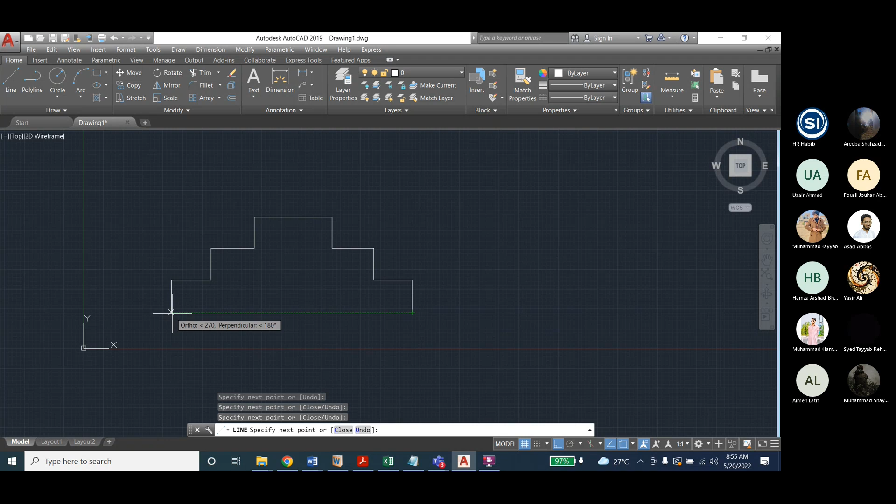And you can use the OSNAP. Like this, the stair on both sides. Like this, done?

It's not matching equally. Just like this, okay, you have to fill it.

Now this object is closed, this drawing is closed. If it is open, meaning there is a small gap or a minor gap between two lines, two endpoints, then this is not a closed object. Then you cannot use the hatch command. So keep it in mind. If hatch command is not working, it means you are not using OSNAP or you are not properly drawing this object. Okay, let's go to draw and hatch.

In hatch, there is an option pick point. Here you can see the pick point. Pick point, just enter, click the center of the object, and it will be done. And you can change the color, for example change to blue color, like this. So hatch is done. Okay, so this drawing, you have drawn this sketch.

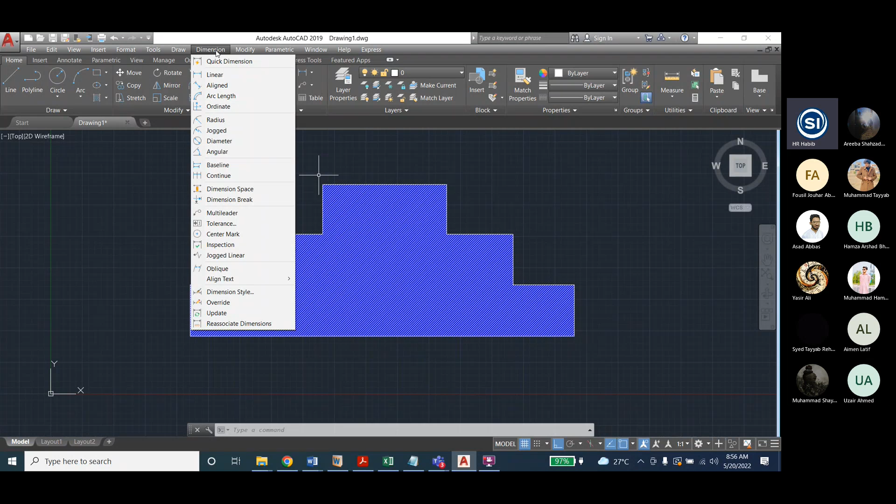Now again we want to go to override, and to use override and update, we will do something, I mean dimension. Go to dimensions, linear dimension, and just draw this dimension, for example like this.

And then go to baseline dimension and draw the remaining one like this. Okay, so we have done this. Right side of the stair, we have used baseline to dimension this.

We need linear first, first one linear and then use the baseline. And on the opposite side of the stair, we will use dimension, for example continue, just to see the difference. So continue.

Continue, it is continuing from the last command. So I think that's not feasible. Baseline is okay, baseline is okay.

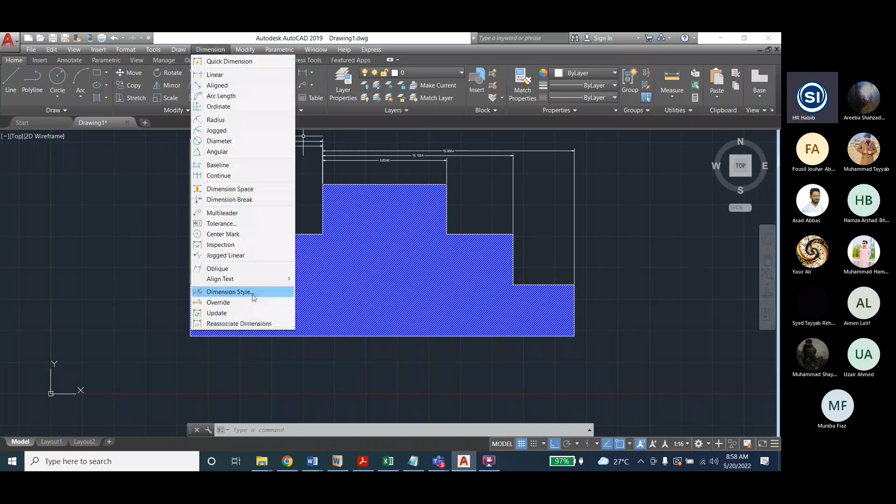Now go to dimension, go to dimension style, and you can also write D in the command window and just click. This box will appear, and here we want to select the new style. For example, 1, I will name it new style 1, and continue and continue.

Okay, I will write 1. So 1, this is 1 because style is 1. Just to remember, the style is 1 and arrow size is 1. Text size is also 1. Just go to and text size 1, okay.

And text color, you can change the text color, for example green, just to see the difference. And similarly in lines, you can change the lines color red, and extension lines, for example yellow, just to see the difference. Done? Okay, then okay, so style 1 is okay.

Now we want new style 2. Continue. And then go to symbols and arrow size is 2. Symbols and arrows, the arrow size is 2, and text size is also 2, okay.

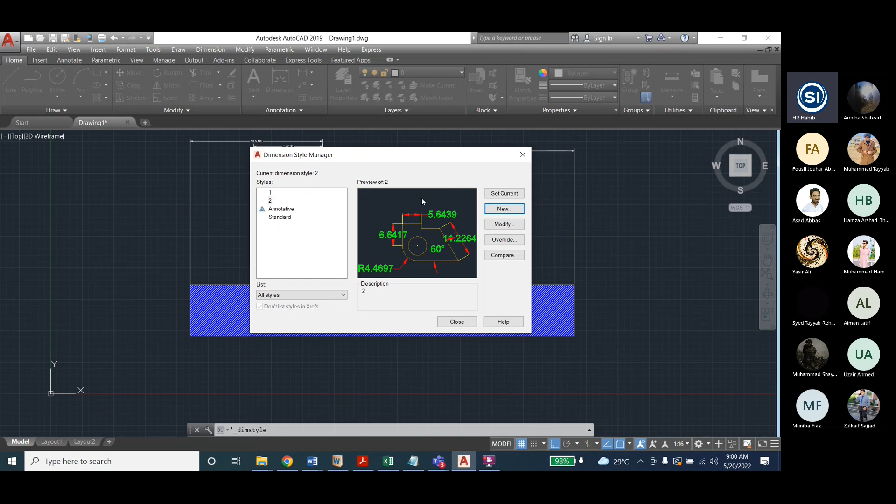Remaining is okay, remaining we are not changing, okay, two sizes okay. Now new, again new, style 3, type 3, and then go to arrow size is 3, and similarly text size is 3, okay, and okay.

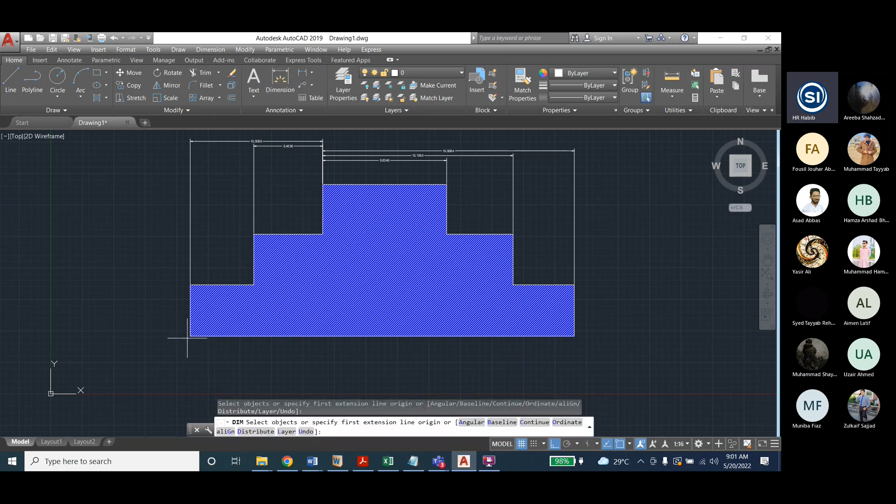Now style 1 is selected, but if you will draw any other new dimension, for example, I will draw new dimension in the bottom, just draw, you will see style 1 is applied. Done or not? Who has done this?

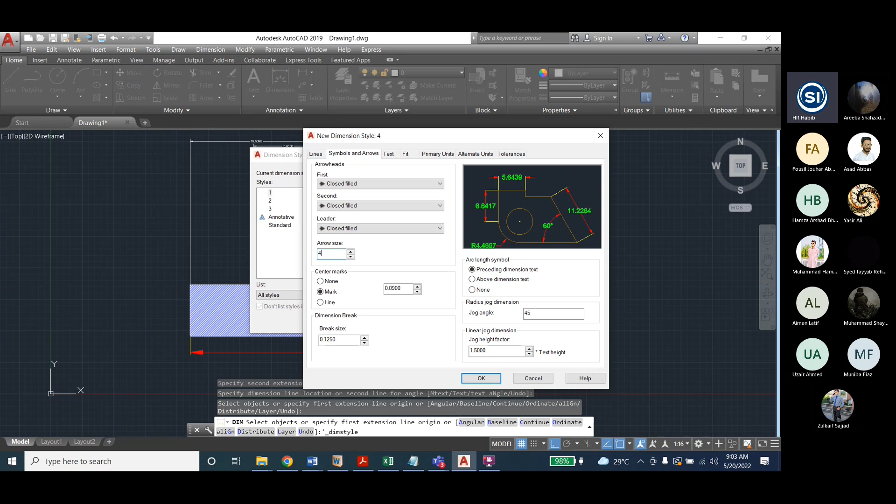Okay, you will say name it as 4, then continue, and then a new window will appear, and you will go to option symbols and arrows, and there is an option of arrow size, and you will change it to 4. You will change it to 1 or any size you want, and then go to text option.

And the text height is again changed to a new value. I'm changing it to 4 because I'm naming this style as 4, for example, and click OK and close.

So now, for example, if you will go to dimension style 1, and then I will set current as 1, style number 1. Okay, so style 1 is now set current, but if you will draw new dimensions, for example, click here and then just dimension any side, you will see the new dimensions are placed with the new style 1. Yes, but the previous, you can say, all previous dimensions are only set to standard, so we want to change those dimensions.

So we'll use the command update.

How to use the update command: go to dimension, click update. It will say select objects in the command window. This means which dimension you want to update to the new style, which you have already set as default, style 1. So you click the previous dimensions, for example dimension 1 and 2. Press enter, and you will see these two dimensions are updated to new style 1.

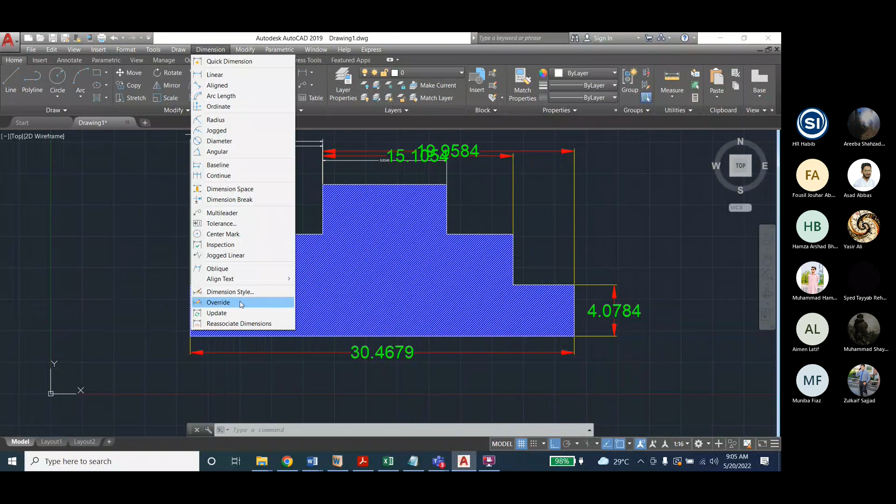Who has done this? Right, not everyone has. No update done. Who has done this update command? Who still needs help for this update command? Anyone need help? Let's repeat it again.

Go to dimension, click update, and in the command window it will say select objects. First you have to select the style you want to update. The proper steps are: go to dimension style, and for example I will choose style 2, then click style 2 and set it as current. Now, with style 2 current, go to dimensions, update, and select one dimension. For example, this dimension I want to change. You can select as many dimensions as you want, then press enter. So this style is now changed to style 2.

Yes. So in this way you can update as many dimensions as you want.

Now you will notice that the dimensions are overlapping, so you have to create some space between them. In the newer versions of AutoCAD there is an option called dimension space, but in the old version there is no dimension space. You can manually move a dimension by selecting it and moving it upward, so you can create space between any two dimensions.

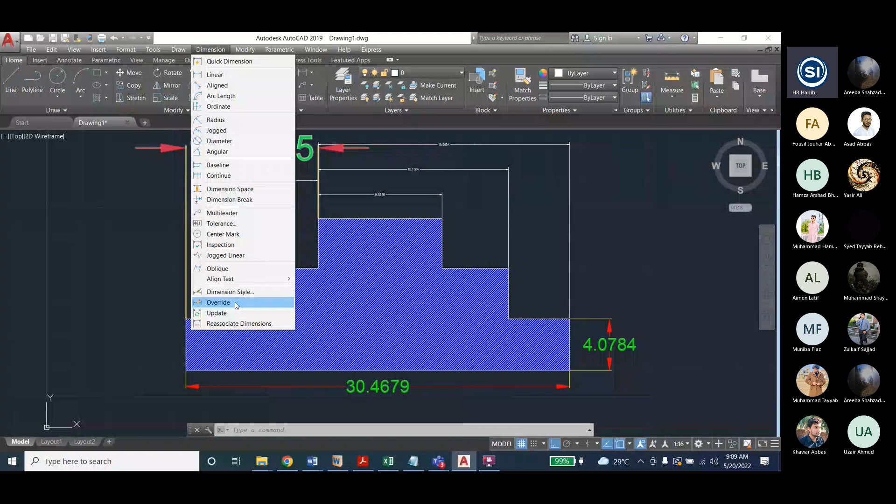Now we'll use the override command. Click the override command — override for all students. It will say enter dimension variable name. There are many dimension variable names you can remember. For example, one I remember right now is for changing the text height: dim and txt. Similarly, you will remember other abbreviations and can enter them here.

For example, the first variable I want to change is the text height, and that command is dim txt, so I will write it in the command window. First I click override, then in the command window it says enter dimension variable name to override. So the variable is dim txt, no space. This command will change the text height. Press enter, and it will then say enter new value for dimension variable.

Enter new value for dimension variable. By default it is 2, because we have selected style number 2. So I will change it to 0.5, for example.

Press enter. It will again say enter dimension variable name to override. Now the second variable, if you remember, for example arrow size, then the third variable, repeat as many times as you can. Then when you finish all the commands, press enter again.

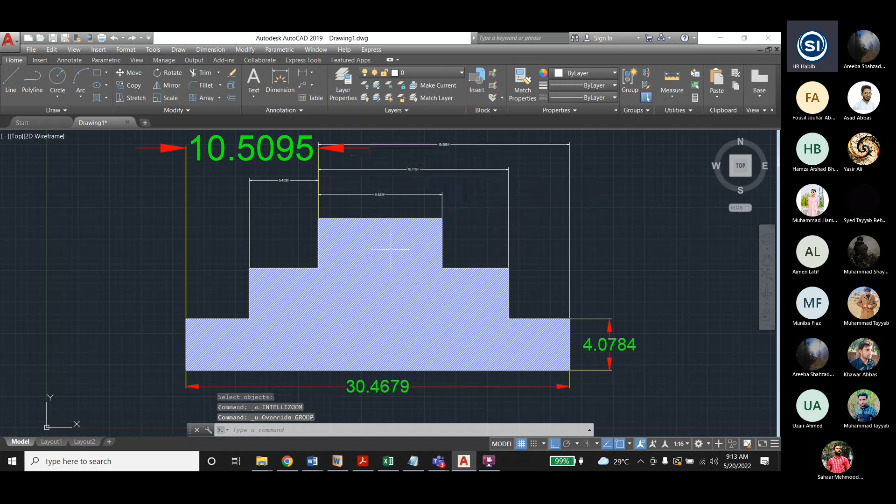So you can change it back with Control Z. And similarly, now you want to move this object.

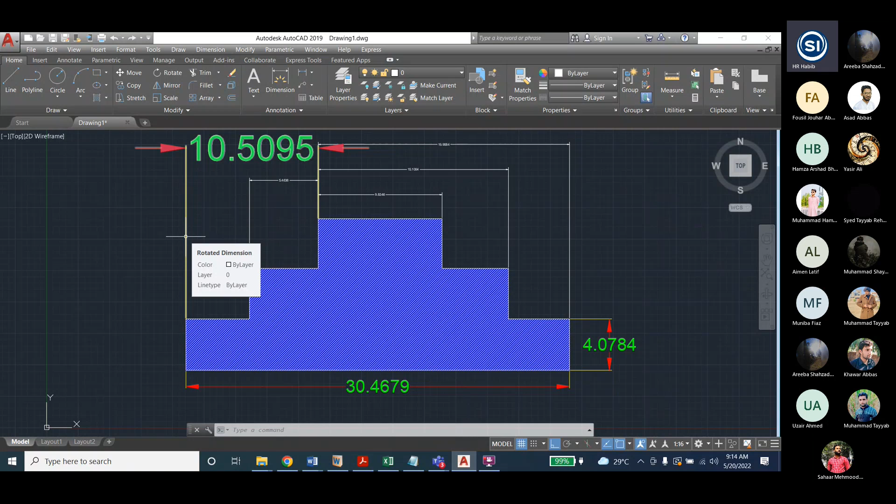So now, for example, you will select this. How to select this whole figure? Just move your mouse around the figure, left click your mouse and move around the drawing.

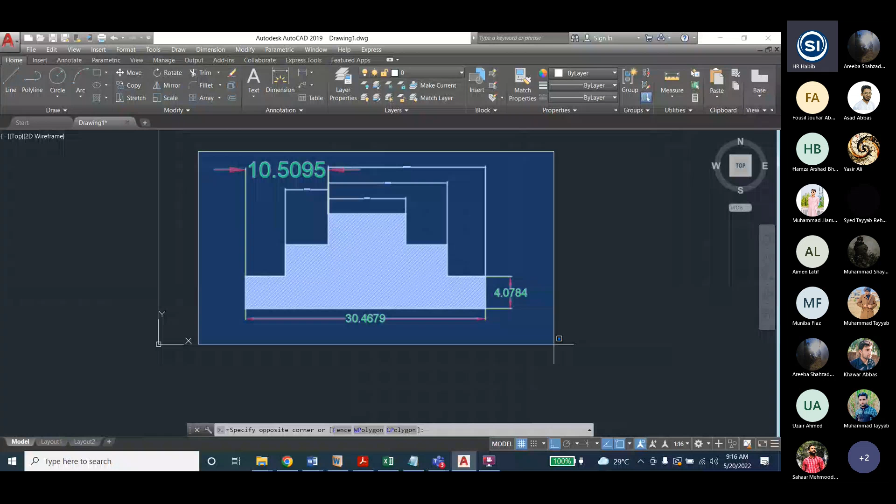Now it's selected. Now go to the command window, and the other option for how to select: just click one time, click and leave, then move your mouse around the drawing. When it is highlighted, click left click again to select it up. These are two options to select any object.

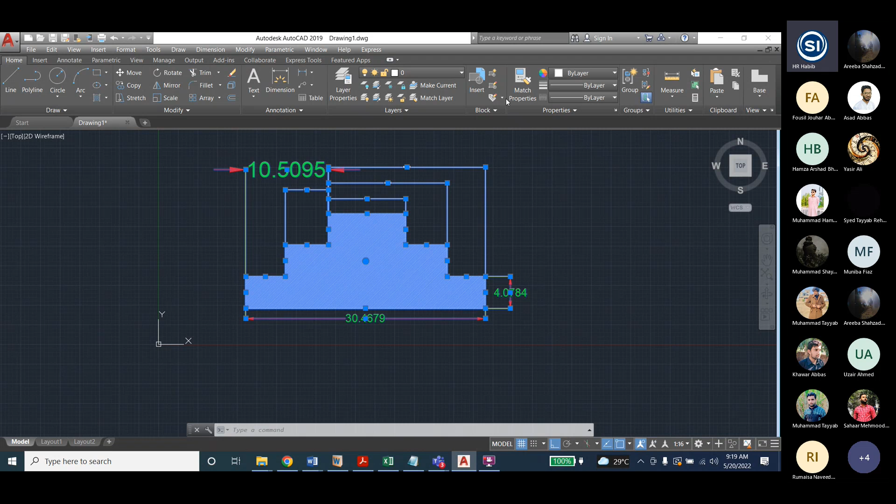And similarly, how to do this in the tool. Go into Customize, go down there. Go to the tool palette, this is something else. So I think, who will tell me for the old version how to go select the group command? I mean there is a group icon. How to find the group icon?

If anyone found the group icon in the old version, just tell. For the newer version, I am telling that just right click near the menu bar and you will see show panels, and in show panels there is the option of group. You can check it and the group icons will appear near the tools. But for the old version, can anyone do this same? Can you trace this group? Done? Have you found the group option?

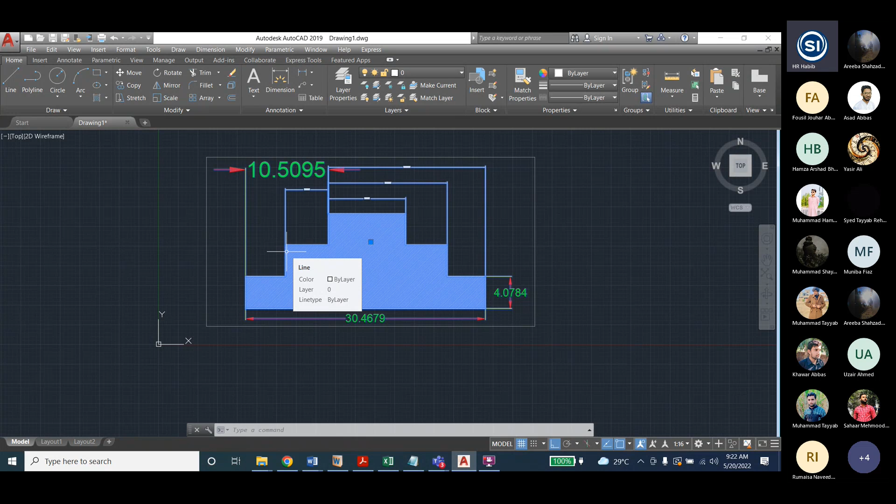Try to resize it. If resizing works there, I will group it again. Just group it and resize it. Whether you can resize it or not, I think so. Resize not possible. Resizing, I mean the whole object is grouped. Now can you resize? No, because resizing is not possible.

Now you can move it. Okay, scaling will not happen with this. You can see it in the middle. This object which is already grouped - when you select this, just left click on this object, and there is a square. You will see when you select this object, a square will appear in the center on the right. You will click on that square and just move this to the left side, for example. Drag to the left side and leave it.

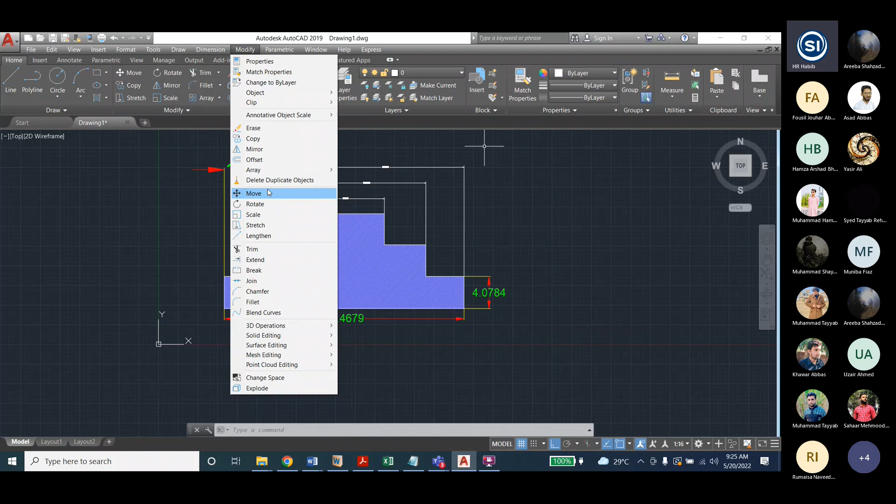You will click move, and then it will say select the object. You can select any point because the whole object is grouped, so you can select anywhere on the object and the complete object will be selected. Then press enter. Now it will say specify base point, so for example, any left point or right point, I will select as a base point.

Then it will say specify second point. Now you can specify the second point, or just move your mouse anywhere and you will see it moving. You will use the ortho command, then you can move it into the x-axis or y-axis at 0-degree or exactly 90-degree angle. If ortho is on, it moves exactly parallel to the x-axis or y-axis; if ortho is not on, it may move at some other angle due to hand movement. So ortho command must be on, and you can see the importance of the ortho command in this move command.

So move it to the side of the window, and now the remaining window is empty. You will draw the next drawing. So like this, you can move. Done.

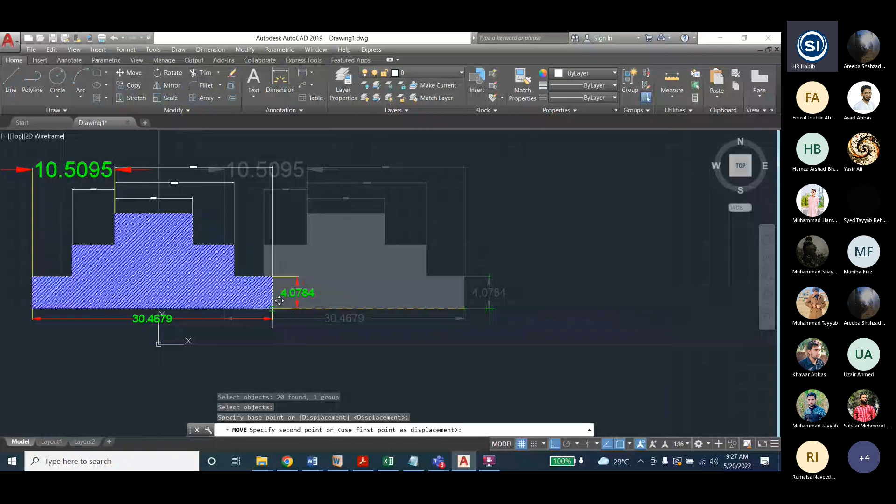And for scaling, which is also an option in the modify menu, if you want to scale it, just select this command, right click, and there is a scale option. Just click the scale, and you will see specify base point. Just specify the base point of the drawing, any point. For example, I have selected the right bottom point.

Now it will say specify scale factor. I want to scale it to half, meaning I want to change its size to 50%. So I will write 0.5 and press enter. You will see the whole drawing shrink to the new size of 50%. Done.

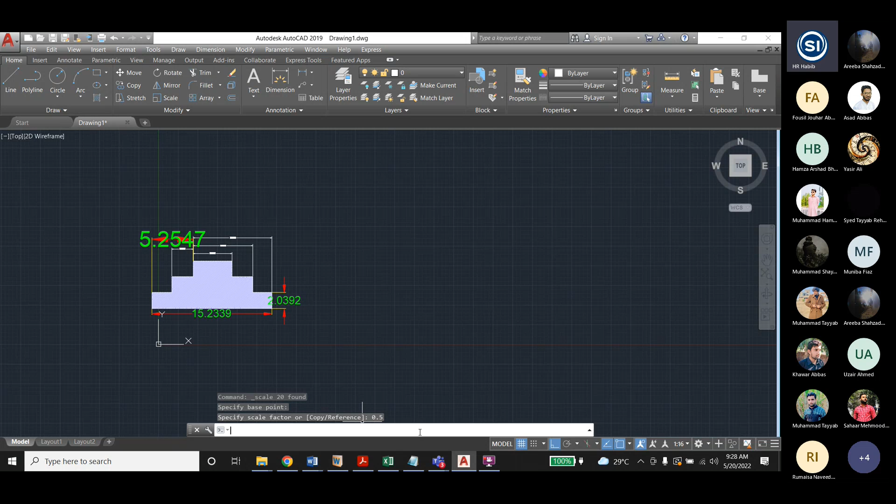Let's try again, undo that. I will now select the dimension, I will select the dimension and try another option. For example, go to modify, and there is a scale option. Now it will say select the object. Select this object, just click on the drawing.

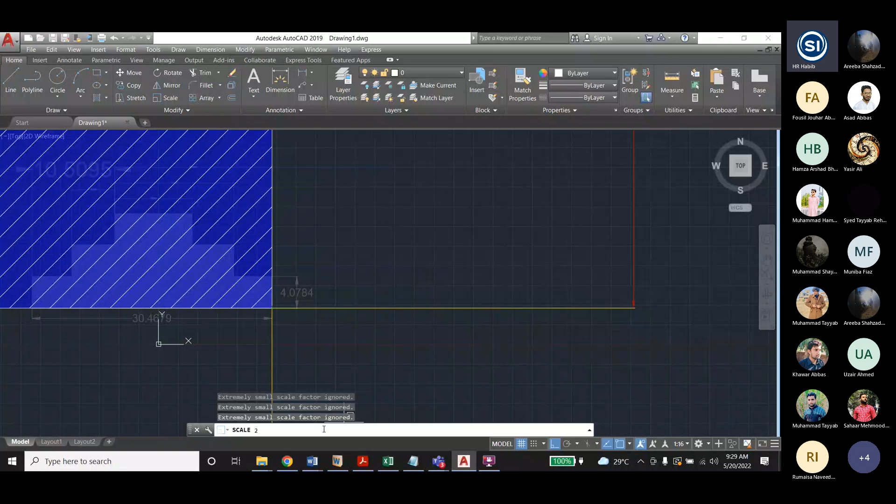Now press enter. It will say specify base point. You can select any base point, for example the right bottom corner of the drawing. Now it will say scale, shown in the command window. Scaling means I want to scale it 2 times, for example, which means 200%. I want to change it to double the size. So write 2, press enter. You will see the size changed to double. So this scale command is also part of the modify command, but you can use it directly.

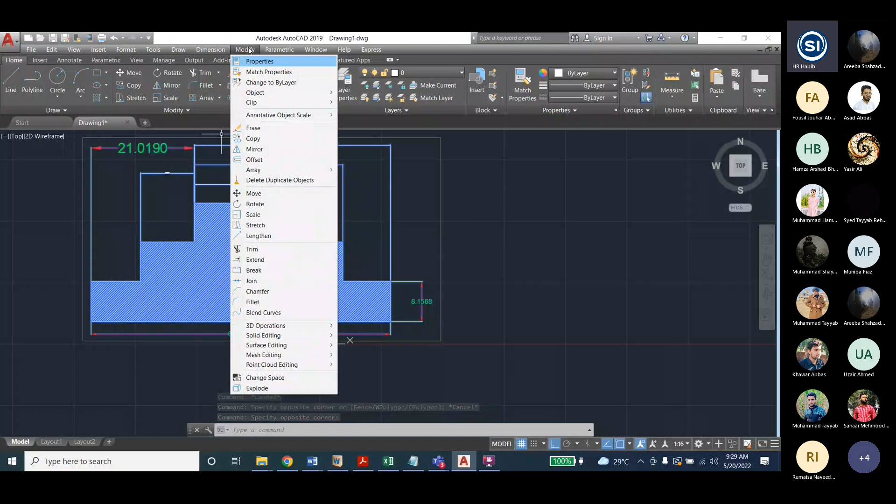The remaining parts of the object will be shrunk or extended according to your dimension scale. For example, now I want to scale it - I want to reduce its size to half. Half means 50%. If this is 1, then 50% means it will reduce to half. So I will write 0.5 - 50% means 0.5. Press enter. So you will see the result. Done.

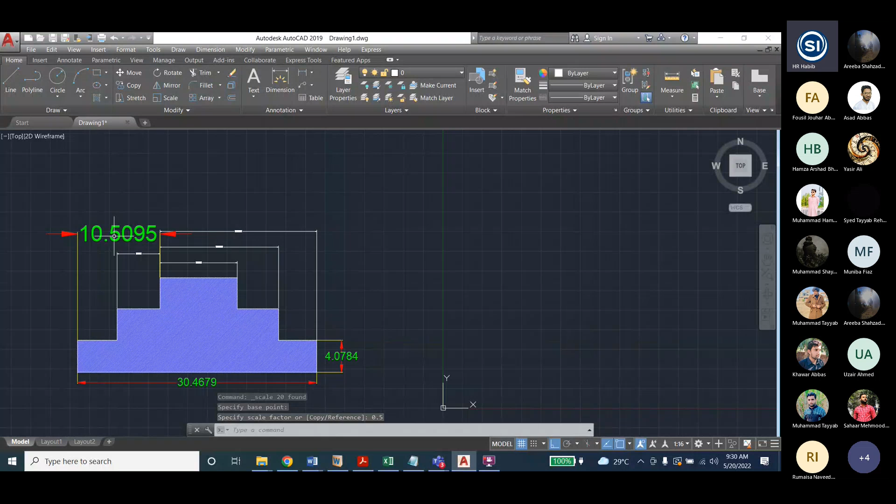Now we have done that. Now in dimensions there is a last option: reassociate dimensions. And for reassociate, we will just draw one simple line, for example like this. We'll draw a simple line. Okay, you have drawn the simple line, this line.

Now dimension it - just use quick dimension, for example, so you can see the difference between quick dimension and linear. Just select this, press enter, and place the dimension anywhere. So style 3, I think, is selected by default. Style 2 - so that style will now be active. My style 2 is active.

Now you can see here that now we want to use the reassociate command. You have drawn the line and you have dimensioned it, right? Are you done?

Now go to dimension and reassociate dimensions. In reassociate dimension, it will say select the object. Just select the dimension, not the line. Press enter. Now it will say specify first extension line.

For example, it is the end point of the line. That line, not the dimension line, no. Before dimension, the end point of line, just select the end point of line. This is the first, specify first extension line, for example.

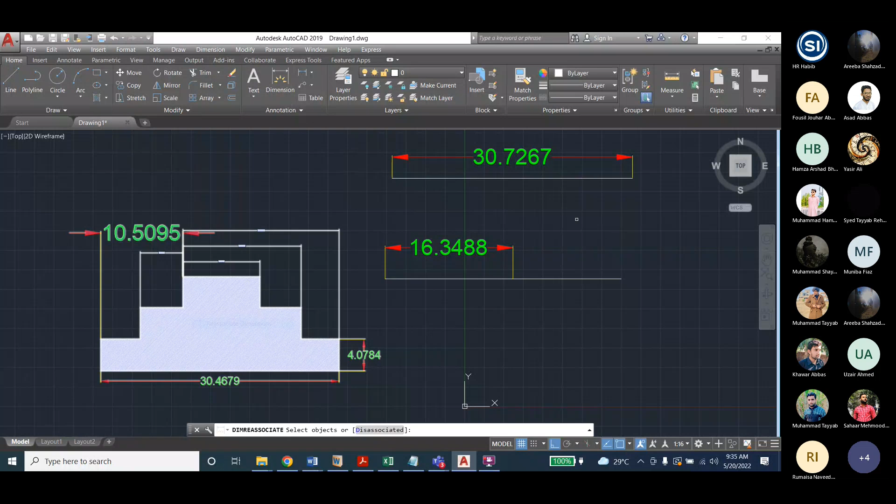So I will draw the line, for example, from right to left and dimension it. Let's see the difference, if there is any difference or not. Now I will reassociate. Select this.

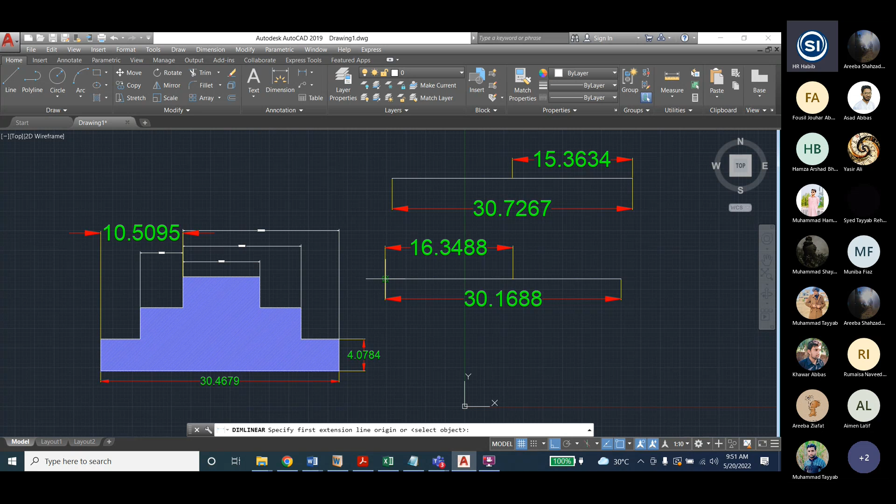Yes, we have to select - go to dimension style first. Again, I am repeating this same complete process just for clarity. Go to dimension style, and there is an annotative option there - select this annotative first, then select set current. Set current is done now. Close this, and now you can scale it.

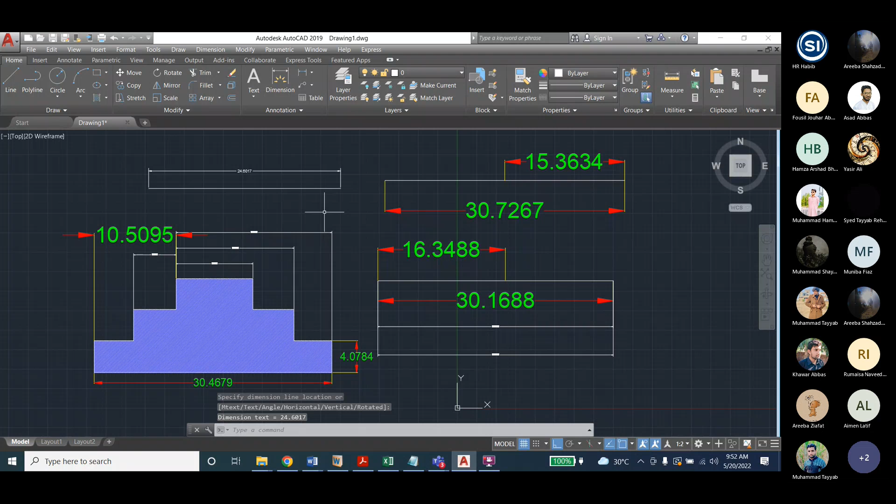For example, now I will scale it to 1:2, then draw any line and dimension it - linear dimension for example - and you will see the size is 1:2. Now select size 1:50, and you will see the size automatically changes to 50 times.

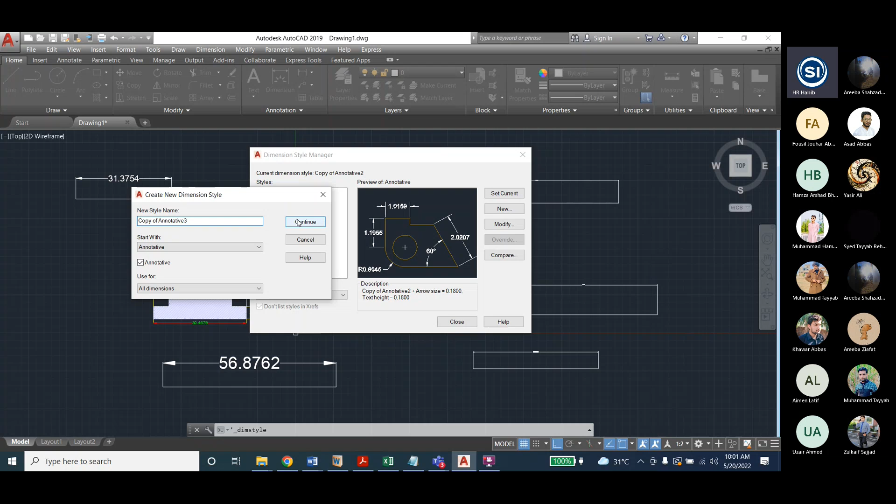And then click new. Click on annotative, then click new. It will say copy of annotative. So you can say copy of annotative 1, for example. Just continue, I will say 3 because I already done 2. Copy 1 and then

Continue again, the same window will appear. So you can size it to 1 because you are using copy of annotative 1. So size 1, just for understanding. And I will say 3, and size of the arrow again 1. Okay, and similarly size of the text 1. Only these 2 things you will change. And then click OK. So copy of annotative 1 you have done, I think so.

Done or not? Now similarly, make a new annotative, copy of annotative 2 and copy of annotative 3. For 2, put the size 2, and for 3 put the size 3. In this way you create 3 copies of annotative. 1 copy of annotative 1, and copy of annotative 2 to 3. Just create the 3 ones. When you are done, tell me.

This is for only new versions. Just pause please, only for new versions, those students who are using new AutoCAD, okay? Annotative style, because the annotative style is very helpful, so we have to use it.

Done all 3 annotative styles, done or not? Done. Now you will select the annotative style 1, just select the annotative style 1 and set current. Set current, done. And close this window and draw any line.

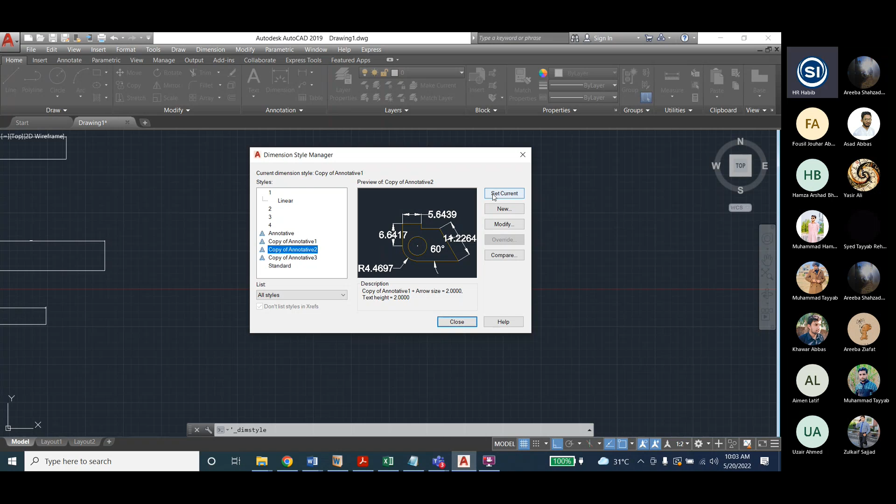Select in the dimension style, select annotative style 2, set current. Close and again draw another line, 2nd line. And dimension it, dimension it. You will see the new dimension. This has the style annotative style 2, meaning the size is double. Done? Done.

Now go to dimension style and select the annotative style 3 and set current. Close it, again draw the third line and dimension it. Dimension it. Done or not?

So annotative style 1, 2, 3 - we have drawn 3 different lines, one under annotative style 1 and then 2 and 3. You see the difference? Now annotative 1 has the dimension size of 1 unit, and similarly annotative style 2 has the dimension size of 2 because we have selected 2, and annotative 3 has the size of 3 because we have selected 3. Now we will see the difference of annotation.

Okay, go to scale and set it to 1:1. Is it 1:1? 1:1. So you will see in 1:1, the annotative style 1 dimension is size 1, annotative 2 dimension is size 2, and annotative 3 dimension is size 3.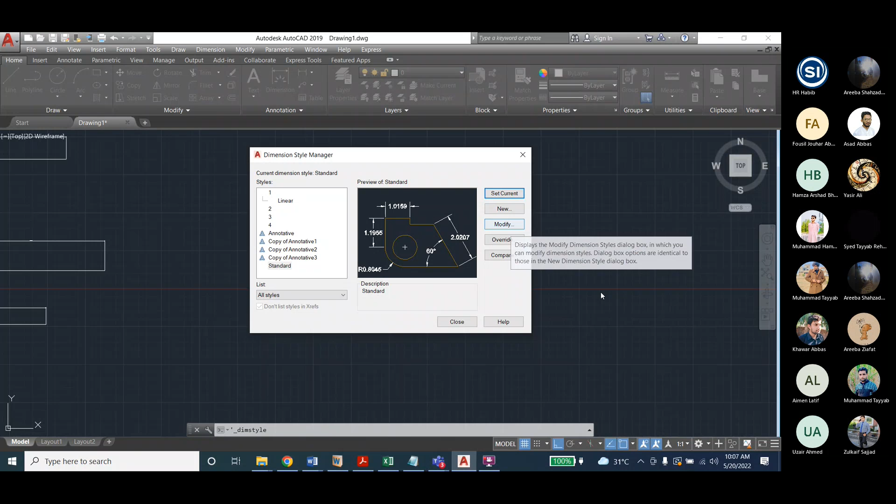Now go to dimension and select the standard. We don't want to use the annotative style. Select standard and set current, okay? Done. Now select standard and modify. Modify done or not?

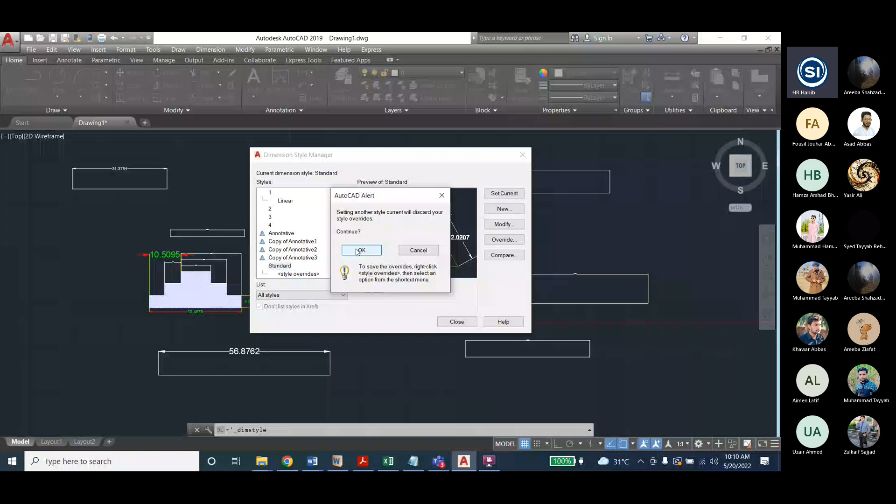Keep it in mind that in the dimension style, standard is set current, okay? First go to dimension style standard and set it, then apply the update command. Go to update.

Update. Now it will ask to select all dimensions, for example, like this.

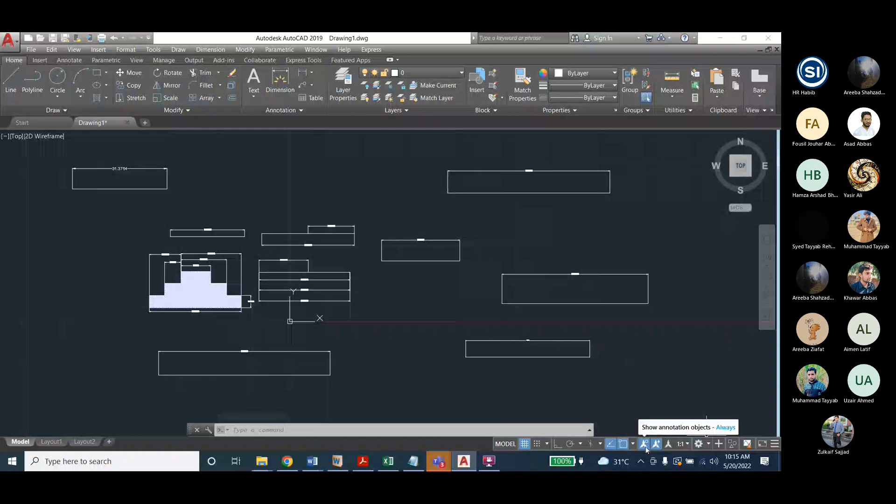Set front, so it has changed. Mine is changing too, yes it has changed. This one isn't changing, let me check this one too. I will update it like this. Yes, this one also changed, this one too. It's all changed now. I will go to dimension style, standard, modify. I will change it to 4, for example 4. I will set it current and close. You will see all the sizes are changed to 4.

First, use the update command to convert all the dimensions into one standard style. Now you can change the size, modify the size of the text and arrow.

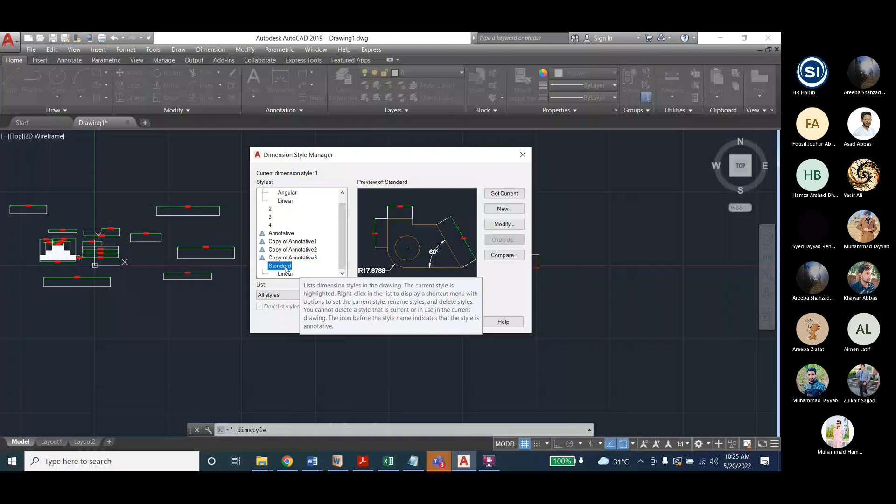Go to standard, for example in standard you will select new, done. You select for use, only in the window you will see there is 'use for linear dimension', and then you will select continue, for linear dimensions, okay, and continue, just go to continue, but I will modify because I will continue, okay.

A new window will appear and you will change the size. For example, text size is 1, for linear text, and arrow symbol size is also 1, done. And also in the text, you can color it green, for example green, just to differentiate. And similarly in lines, you will color it green, lines also green, okay.

In extension line, here is the extension line below this green line. In the option of lines, you will see there is a dimension line, and then there is a second window below this dimension line window, that is extension line. The color of that extension line also green, okay.

Done. So all extension line, dimension line, and text are all green. Click OK. So in standard, there is a linear option, and that linear option we have modified to this style.

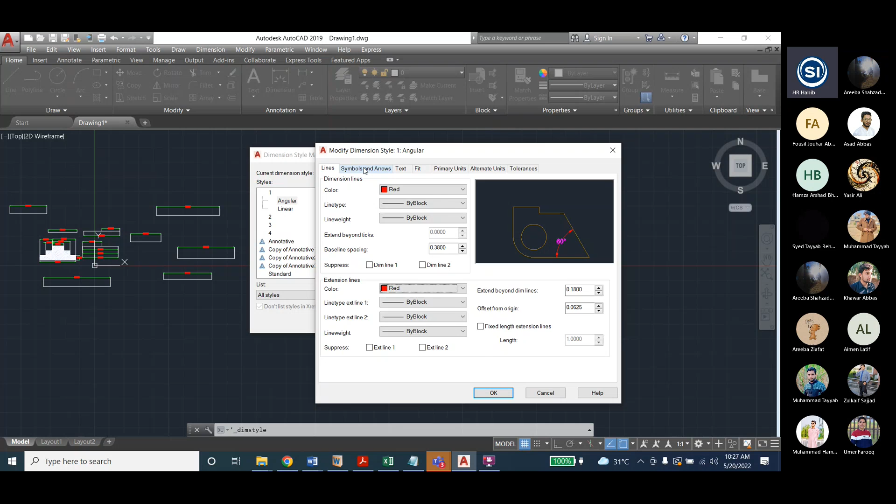Again here we will color the lines - color is, for example, green already, but for this we want red. Red, extension line also red. Then go to symbols and arrows. The arrow size for angular is, for example, 2, while linear size is 1, so we want to differentiate with size 2. And in the text, the color is also red, and the text height is 2. Click OK, that's enough.

Done. Now again in that standard option, you have one style, but use standard. Set new again, and this time you will use it for radius dimension. For radius dimension, then continue.

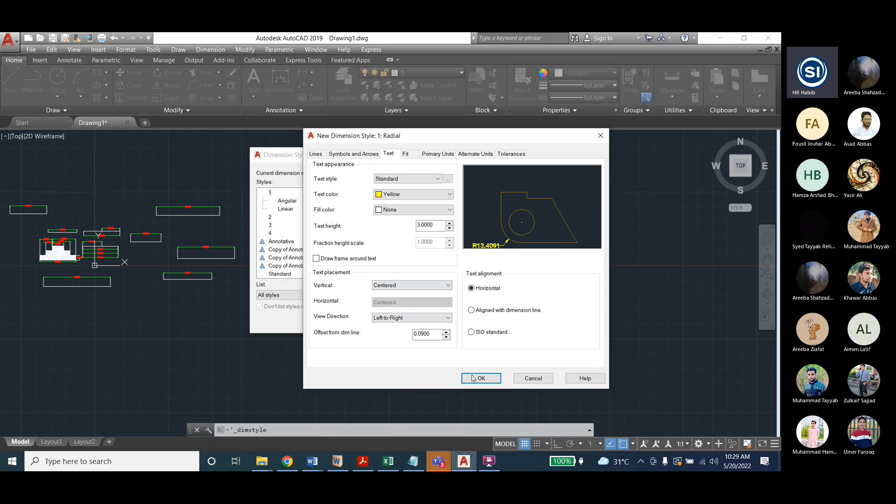This time you will see that the lines color is, for example, yellow. Extension line is yellow. Symbols and arrows size we will set to 3. This time 3, and text size is also 3, and text is also yellow - all yellow, lines, everything yellow. Click OK. So the radial is also done.

Now again go there, select the standard size or any style - one style, standard size, set your size. New. Use for diameter dimension. Continue. Now you will color it - lines color, for example, blue. Extension line blue color. Symbols and arrows size is 4, for example. Text size is also 4, and color is blue. OK, done. So diameter is also done.

Next, again select this standard or your style, new. Use for example ordinate dimension. Continue. Now color is - lines color is not available because this is ordinate. So for ordinate, there is no line color.

We discussed ordinate last time, but we will change it today. Arrow size, for example, is 5 this time for ordinate. Text size also 5. Color is cyan. In lines, because there are no lines in ordinate, only extension line is available, so that is colored cyan. Arrow size is 5. Done. So ordinate is done.

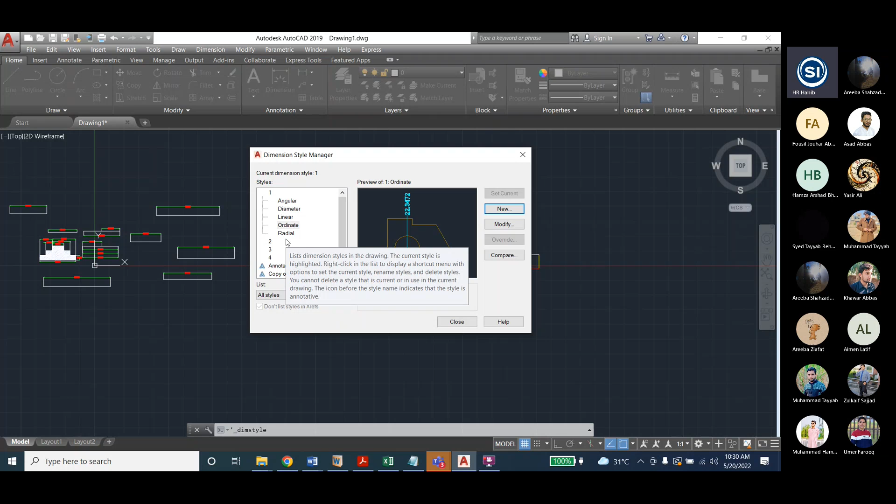Again go to standard and new. There is a last option, use for leaders and tolerances. Continue, and you will set the text color to magenta. Text size is 6. Arrow size and symbol size are also 6. In lines, you will also set magenta color and extension line - but there's no need of extension line for this leader, because a leader has no extension line, only dimension. So that's done.

So all these things are done. Now click standard - my style is 1 and you select standard. Click standard and set current. Set current, done. Okay, close.

Now you will apply all these - first linear dimension, then angular, everything. For example, tell me any one diagram where all these dimensions will apply.

For example, linear, angular - let's make a triangle, okay? Yes, very good, triangle. So just a triangle.

Use the line command and a right triangle, for example. Use the line command and click ortho mode on, and draw a right triangle, and just close it, and deactivate the ortho command. So right triangle is done. Done or not? Like this. Done.

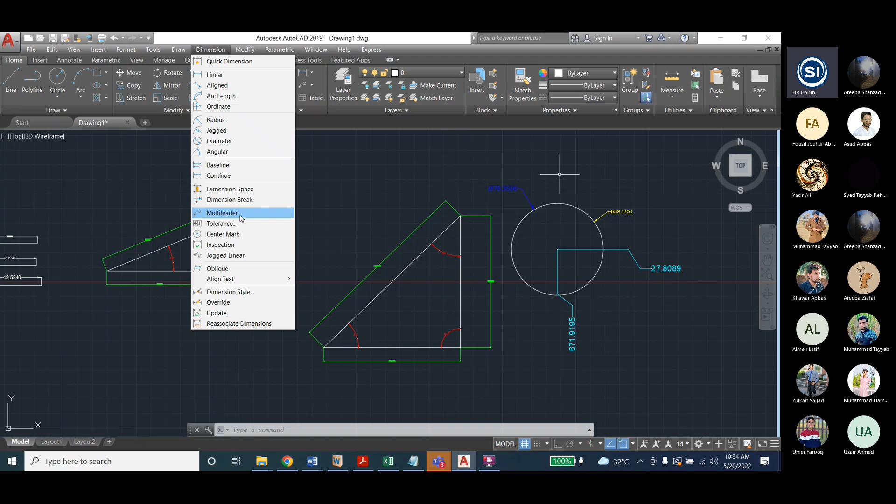Last one was leader. Just go to dimension and select the multi-leader or leader. We already used this command, just apply it now. For the new versions, you have to click first, and a text window will appear.

I will write 'circle 1' for example, then press and close this text leader, or escape and cancel. Now I will place the last second point of the leader, that is the arrow, to the boundary of the circle.

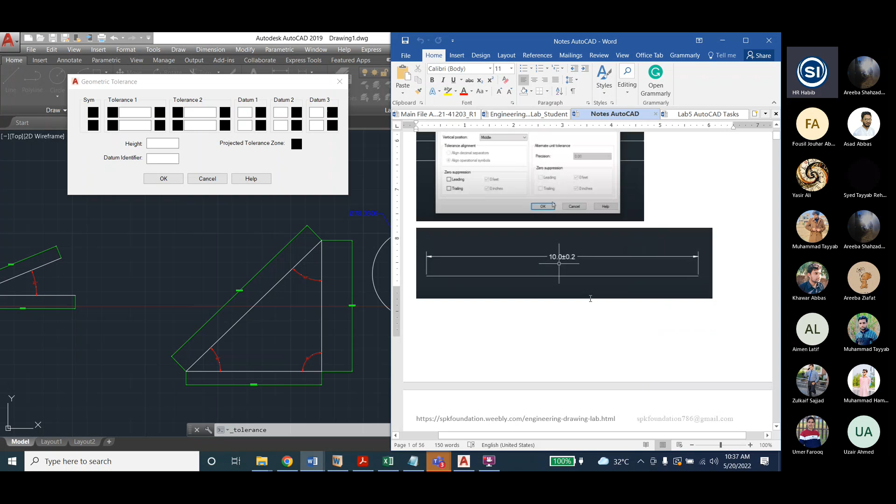Go to dimension and select the tolerance, and you will see there are different tolerances and different symbols. For example, if you want to use this for a civil structure of a building that is straight, you will see the straight line symbol. If it is rounded, there's a different symbol.

Now go to tolerance, and there is a symbol option SYM - just select the first black box, and you will see different symbols. Select one symbol, for example, one. Now go to tolerance and I will apply it.

For example, I have taken this drawing from Google. You can see this tolerance window is available on this diagram, and I want to apply these options here.

The first symbol is a circle with a plus sign inside it. So the symbol is circle and plus sign. Then there is an option phi - just in the tolerance option, select the first black box, and phi will appear automatically. Okay, done.

Now the next option is 0.1. 0.1 means tolerance 1 - I will write tolerance 1 as 0.1.

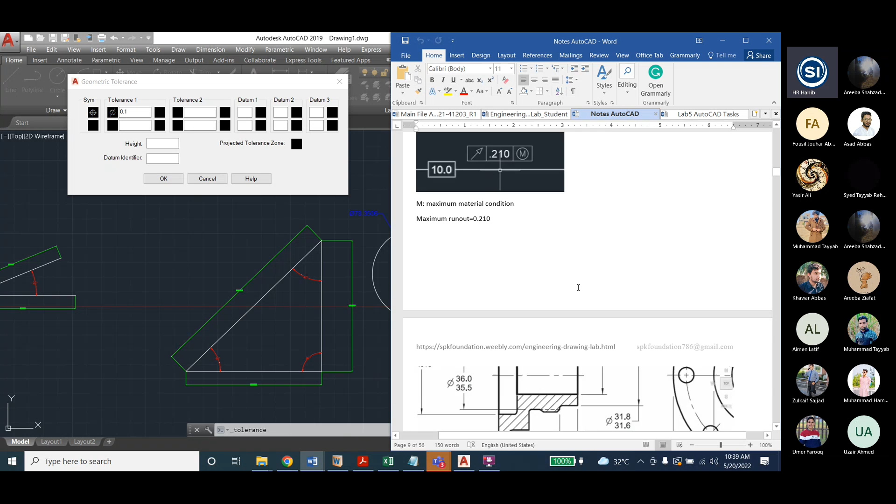Then there is an option M. M symbol, M for material - these are different symbols, M, L, and S, which I already discussed in the previous lecture. For example, M for maximum material condition, L for least material condition, and S also for a similar thing. Select the second black box of tolerance 1 and select M, circle M. This is not the symbol of a motor, because normally the electrical symbol of a motor is different, like this.

Then there was another option. After M, there is a B. B is datum - datum is actually 3 datums. For example, one structure here is 3-dimensional: x-axis, y-axis, and z-axis. For the x-axis there is one reference point. We want to draw a second structure and reference it with respect to an initial point - for the x-axis, we will reference the second structure with any point on the x-axis of the first building. That point we call datum 1, for example datum A, the y-axis datum B, and the z-axis datum C.

So these are datums, reference points. Datum is B, for example. In tolerance 2, you will not write anything. In datum 1, you will write B, for example, datum B. And then there is an option: B is also M, the symbol M. Click the black box of datum 1, select the M, and click OK, and place this tolerance anywhere in the window.

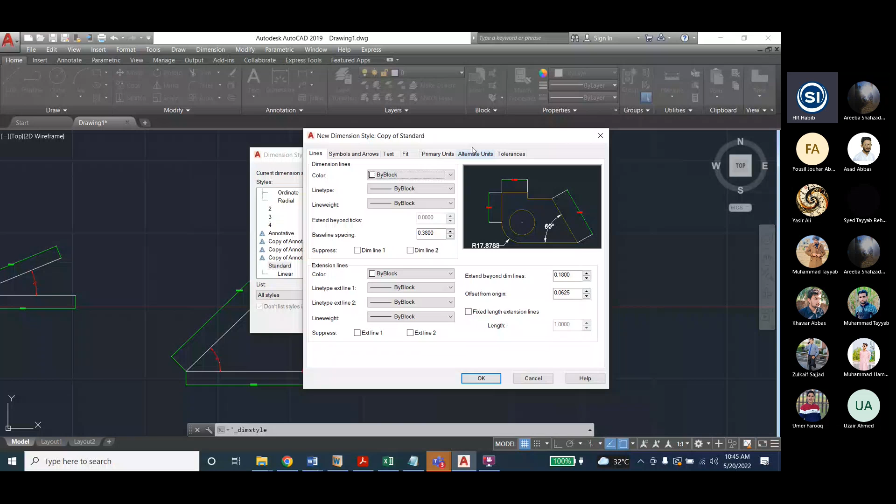Okay, from tolerance. Select the tolerance, and there is a symmetrical tolerance. Just click symmetrical. And now select the upper value, for example 1 or 1.5 is okay, 1.5, right. Okay, done. Click OK, and close. And you will see all the dimensions are added with the tolerance plus minus 1.5.

Done. Okay, again go to dimension style, again the same standard style or one, modify it, and go to tolerances again. Okay, now there is a precision. That precision was for the method symmetrical, but precision was 4 decimal places. Because we have written 1.5, so we need 1 decimal place. Just select 1 decimal, 0.0 only, click OK and close it. You will see now dimensions are plus minus 1.5 instead of 1.5000 like that.

Okay, done. Again go to dimensions, dimension style, same standard style or one style, just modify and go to tolerances. And there is another option, that is deviation. Okay, deviation, and for that deviation, for example, upper value 2 and lower value 1, for example. In symmetrical there is only 1 value because upper and lower are same, but here you can change, upper 2 and lower 1. Okay, only okay, click OK and close. You will see now the tolerance is placed in this way. You can say the dimension, and in the upper side you can say +2 and lower side -1. Done.

Next, go to Dimensions, Dimension Style. Again standard, modify, and go to tolerances. There is a deviation, and then third one is limits.

In limits, you can set the upper one, for example upper is 2, okay 2, and lower is 1, okay. Or upper for example 4, just want to change it to 4, and lower one is 2, okay. Click OK and close.

See the difference, what is the difference? In that dimension, the actual dimension is not there. 4 is added to the actual dimension, and then the 2 is subtracted, I think.

Control Z. You can just remember one dimension, for example my dimension is 78, 78.3. So I will Control Y, first Control Z, no I will do Control Y. So 78 is now converted into 82, it means 4 added. And 78 is converted into 76, it means 2 subtracted. So it's okay.

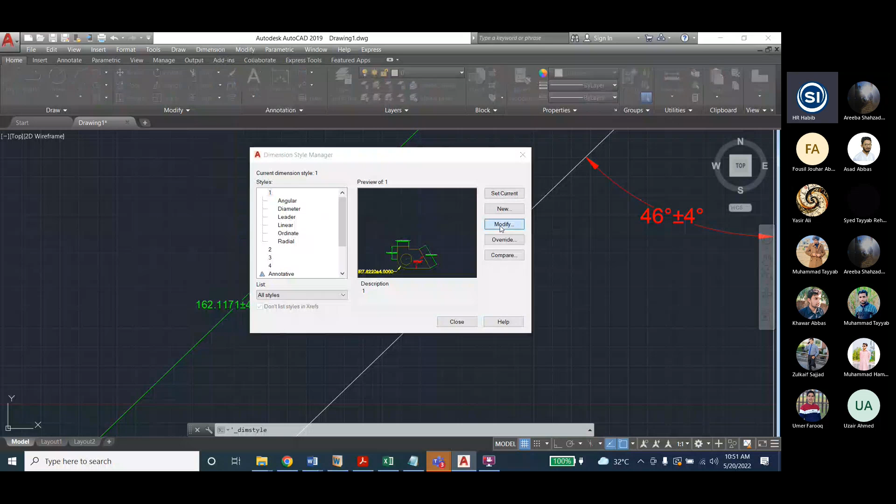Again, instead of bottom, just change it to, for example, top, okay.

There is no difference, it means just change the tolerance option. For example, change it to deviation, and now I want to put it to bottom, for example, and let's see the difference. Yeah, now it's bottom, yeah it's different, there is a difference. Middle was just, you can see the distance between. Now it is bottom. Now I will go to dimension and say top, and see the tolerance position.

Now vertical position is top, close. You see, now the dimension is at the top. Before, the dimension was at the bottom, like that. So now you can feel the difference. Done or not?

Next, modify and tolerance. And tolerance, there is this, done. Align decimal separators, okay, there is a tolerance alignment option. You don't have tolerance alignment in the old version, but in the new AutoCAD, there is an option called tolerance alignment.

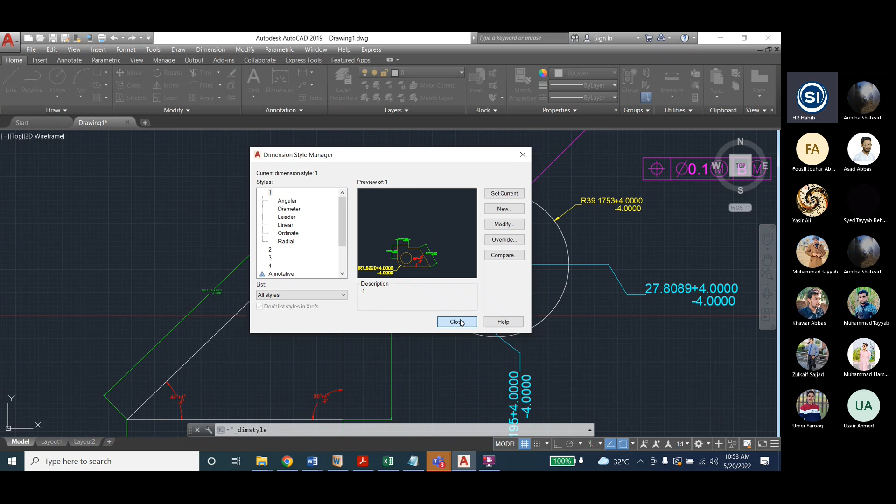So now align operational symbols, and you will say align decimal separators. Click OK and see the difference. Is there any difference? What happened? Nothing happened, right? If anyone sees a difference, let me know.

Or you have to change deviation to any other symbol, for example tolerance alignment, okay, you can change into, for example...

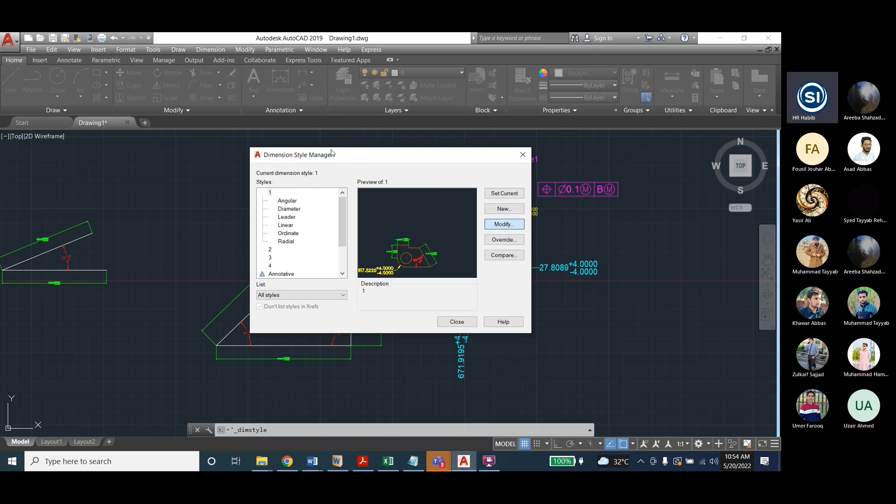Dimension style, go to modify, and then there is a tolerance, and now you align decimal separators and operational symbols. Okay, operational symbol plus minus. Now it will align according to plus minus, the tolerance plus minus. इसमें सारी वैल्यू सेम है ना, पहले ही अलाइन हो चुके हैं प्लस माइनस के हिसाब से, क्योंकि सारे डेसिमल बराबर हैं।

दूसरी दफा चेंज नहीं होगी। लेकिन अगर अभी चेंज करना है कैसे चेंज होंगे? ये देखें ना, अब ये इसमें नजर आ रहा है जैसे ये माइनस थोड़ा सा बाहर निकला हुआ है और पॉइंट थोड़ा सा इस नीचे वाले में बाहर निकला हुआ है और ऊपर वाले में अंदर है। अब ये मेरे ख्याल से जब ऑपरेशन ठीक है।

And just click the zero suppression leading, okay? 0 point नहीं आएगा. No, trailing. First do trailing, I think so.

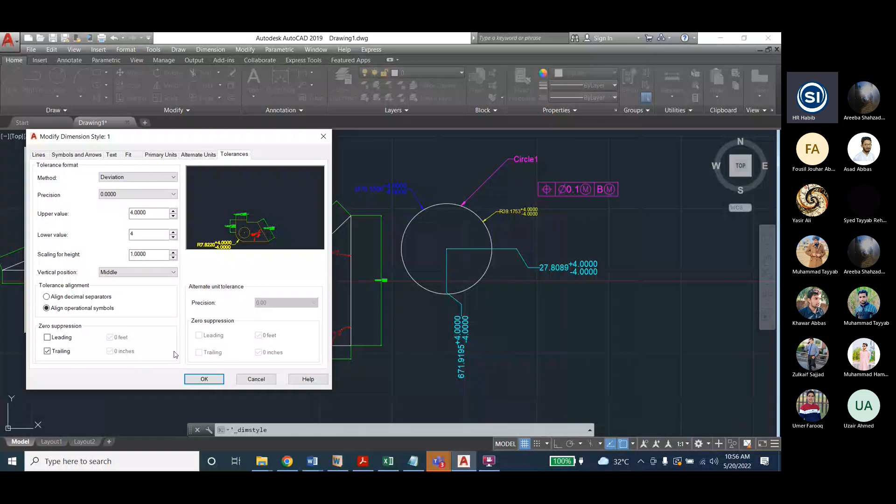But we don't have in the line. And you will see all the, you don't need to select the precision value up to 4 decimal or 1 decimal, that no need. Just select this and it will automatically suppress, you can see the drawings according to, for example, 4 decimal places. If one drawing is, for example, 2 decimal places, it will suppress the next 2 zeros. But the other drawing, for example, up to 1 decimal place, it will suppress all remaining 3 decimals. You understand my point or not?

For example, in dimensions, just go to dimensions, and in dimension style modify, and in tolerance, for example, 4.5, 1 decimal place. This set 4 precision, but that is 4.5, it means it will be 4.5000. Done. Now the second dimension, for example, 4.55, it means 4.5500, so it has 2 trailing zeros. The first dimension has 3 trailing zeros. And the third dimension, for example, 4.555, so for 4 decimal places it will be written as 4.5550. So this third dimension has only 1 trailing zero.

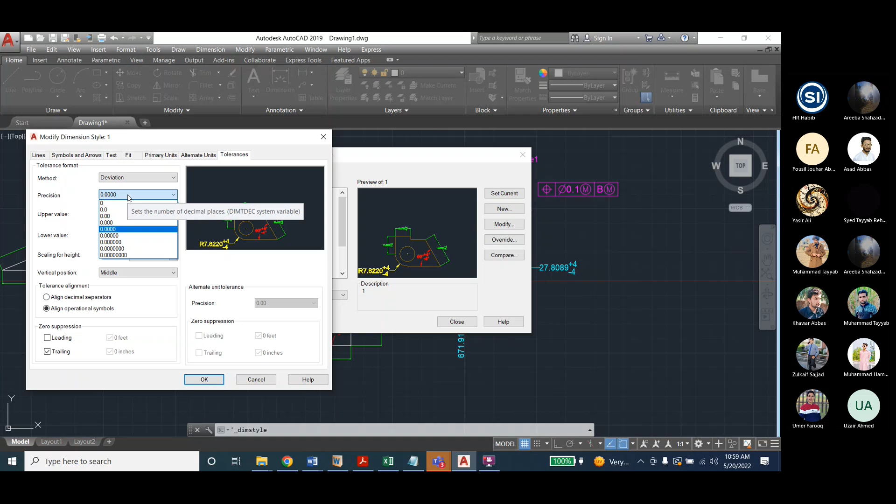Let's start. Just try how to dimension it, 0.4, or for example, how you will dimension it. Anyone dimension it and tell me if you have done this. Just we want to use the zero suppression for leading.

कैसे करेंगे यार? मेरे ख्याल से इसका काम ऐसे है कि अगर वैल्यू आ रही है यानी 0.5, ये शुरू वाला जो 0 है ना उसको रिमूव करके खाली पॉइंट कर देता है। इसको फिर मैं चेंज करता हूँ, ये देखिए।

अब मुझे आप tell me that how to use this suppress command for leading zeros. How to suppress leading zeros? First, we have to place the leading zero. Sir, how to place leading zero? You tell me and try. Just try.

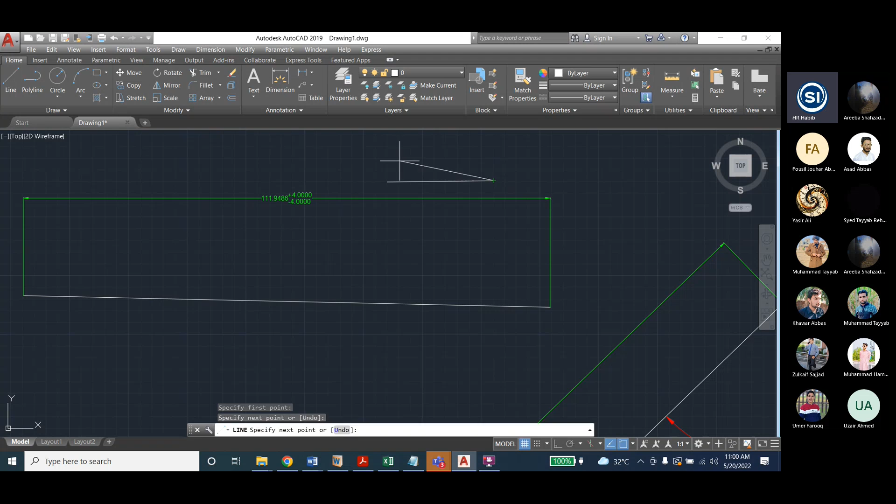0.5, any dimension which will be a smaller dimension, you can dimension a smaller line, draw the smaller line and just dimension it. It will be dimensioned like 0.500, like that. Just dimension it, any smaller line. For example, I will draw a very small line and dimension it. Very small, this is not small. Just use the zoom option. If it is not small, then zoom out just to draw one line, linear.

और जूम करें नहीं, ये ऐसे कर लेना, ये हमने तो पॉइंट की ये वैल्यू चेंज करनी है, ये प्रिसीजन हमने खुद सेट करना है। नहीं, ये 9.2 जो है ना, इसकी जगह 0 पॉइंट हो ना, मैं ये कह रहा हूँ। लाइन थोड़ी छोटी है।

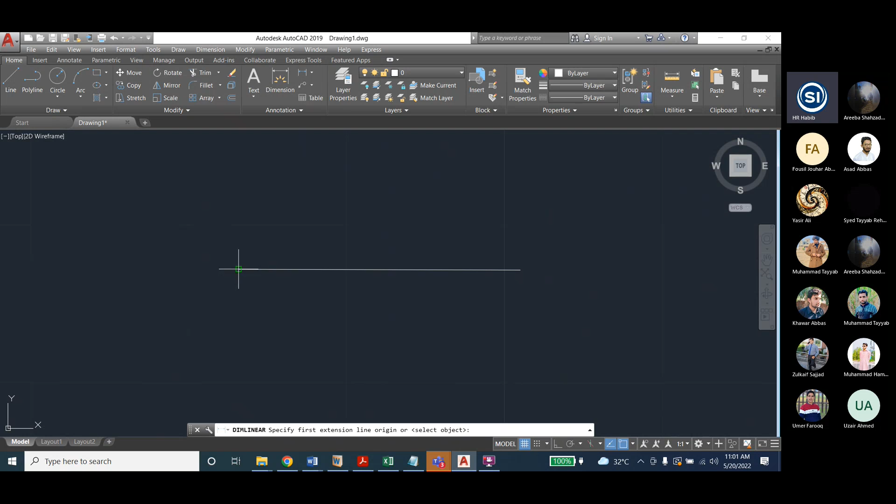ये देखिए ये भी लाइन बड़ी है, ये 3 पॉइंट है ना, ये खाली टॉलरेंस को डील कर रहा है, जो हमारा वो टैब, ये देखे ना, मैं वही कह रहा हूँ कि इसका डायमेंशन ये 1 पॉइंट है ना, इसका मतलब और मुझे इस तरह करना है। ये देखिए होगा ये मुझे, ये देखें 0 आ गया है।

0.8755, for example, very small line, okay, smaller line, 0.5 something. Now 0.8756, okay, now this 0, it is leading. I will suppress that; this 0 will disappear and it will be written as .8756, not 0.87. Now we'll suppress. Go to dimension, dimension style, modify.

In tolerance, zero suppression leading, okay. Click OK - this will not make a difference, this is only for tolerance. See, this is only for tolerance - it only changes if this is 4.0. If we set grade 0.5, you have to change the starting value now. For example, go to dimension, modify, and in the modify just change the tolerance, not 4, just write 0.5.

And for example 0.6, okay, click OK and uncheck leading. First uncheck leading and click OK and close. You will see all the dimensions are 0.5 and 0.6 like that.

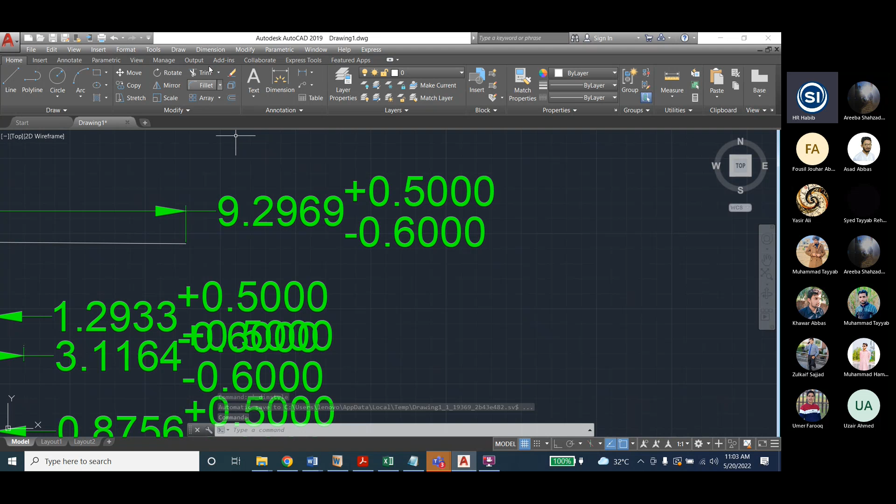Now go to dimension and modify, then go to leading. Suppress zero suppression leading - just check the leading, okay? Click OK and close. You will see now all the dimensions are not 0.5 but only .5, okay? So this is the leading actually.

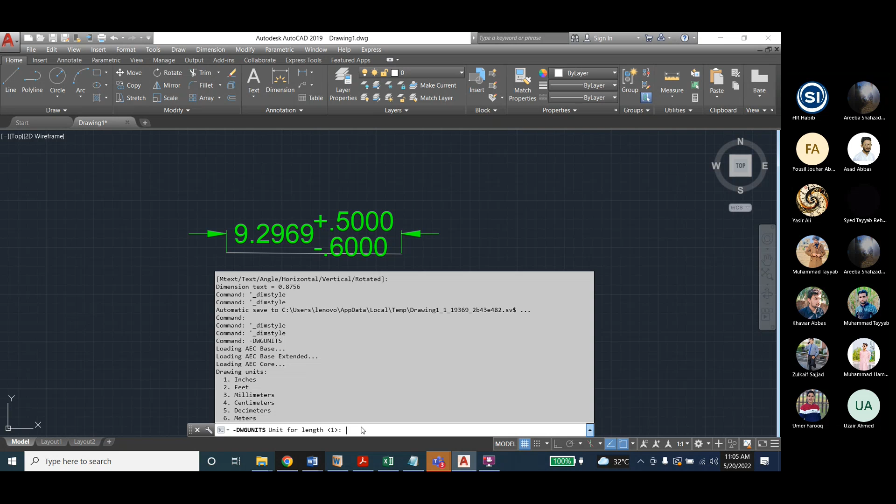And then press enter. When you press enter, it will say the linear display format is 2. 2 is decimal. Press enter. Precision is 4, okay.

Escape. Now there was another option just to see whether the units are in inches or decimal or like that. Go to this option A - for the new versions, just write left top is a capital A. Just click that and a window will appear, and here you will have the option drawing utilities, and here you can see there is a units option.

Just click your units and this window will appear. Okay, and this window, I think, is for old versions. Yeah, drawing utilities. So units, yeah - in the format option, there is the units option, in the format. And this format option, I think so. Yeah, this format option also for the newer versions.

Go to format in the menu bar, and there is a units option. Click it, and a window will appear. Okay, and you can see that there is decimal, and then the units are inches. Click the inches dropdown, you will see unitless, inches, feet, miles, millimeter, centimeter, meter, and everywhere.

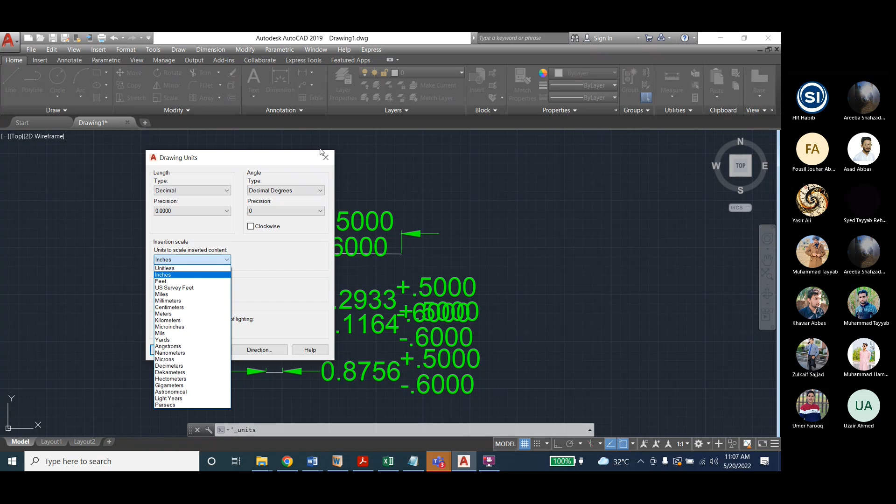But these units will not be changed this way. For example, if you select feet, this feet will not actually change. I already discussed - you have to change it using the minus dash DWG units command, and then confirm. Just open this window, it will be changed. Okay, so you change the units using dash DWG units. Okay, now our primary units say decimal.

Okay, and inches. Okay, go to dimension style, and then modify. And in the modify, just go to alternate units. Okay, and we have the units in inches. Now we want the alternate unit. Alternate units mean another unit - the second unit will be placed along with the first unit.

And that unit will be different depending on what you want. For example, we want to convert - we want also inches, and also we want feet, for example. So it means if we want feet also, since inches is already there, we want to convert inches into feet. What is the multiplier?

Want to convert inch into feet. 12 inches is equal to 1 feet, so 1 inch is equal to 1 over 12. 1 over 12 means 0.083, that's how much it comes to, 1 divided by 12.

I will write this in the alternate units. Just check the box for display alternate units, and you will have the option of decimal. We want to use decimal, that's okay. Otherwise there are other options like engineering and fractional you can use, and precision is okay.

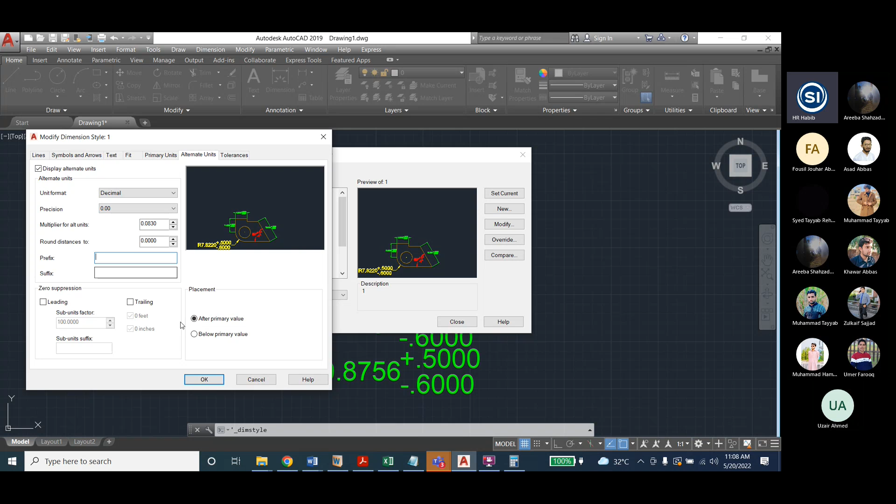Now we want the multiplier for alternate units. This multiplier will be 0.083. Write this and click OK. Also the prefix, we will use it later. Just click OK and close.

You will see all the dimensions, and the new alternate units are also placed within the braces/brackets, along the primary units. You can see, for example, my unit says 9.29. This is inches, so 0.77 is feet. If I want to confirm whether it is in feet, I will convert feet into inches.

Just multiply by 12. For example, 0.77, I will multiply by 12. You will see 9.24, so it's okay, around 9.24. So this is not exactly 0.77, maybe this is 0.7777 like that, so it will be converted into this.

So the new alternate units only has 2 precision, precision up to 2 decimal. If you want to change it to 4 decimal like the previous primary units, go to dimension and dimension style, again modify, and alternate units. Here's the precision, round distance is 2. No, precision 4, just put the precision 4. Okay, click OK and close. You will see the new units also have precision 4.

Now I want to convert 0.7716. 0.7716 multiplied by 12, okay, you can see 9.2... because precision is 4 decimal, so 9.259, but the actual primary unit is 9.29. Why? Because maybe 0.7716 and the remaining units are also there. It is multiplying, so it will be like that. So, okay.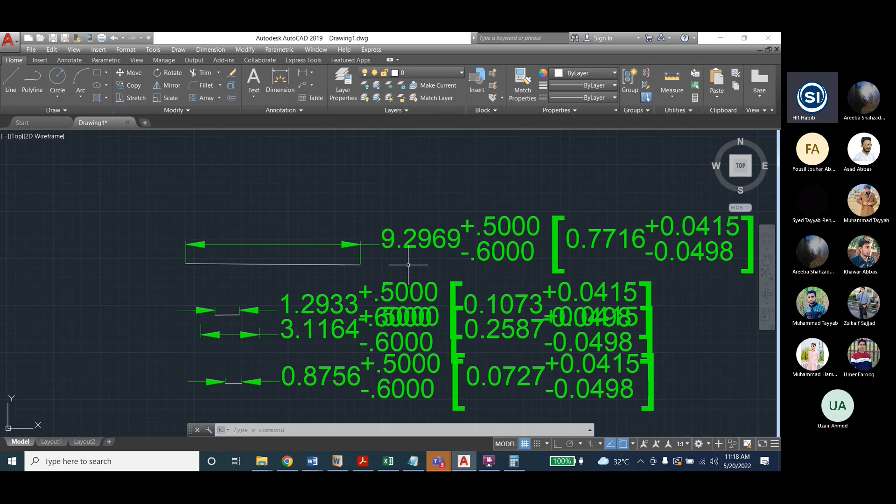अच्छा, अब मैं ये करता हूँ, इसकी जगह मैं 3 डालता हूँ। यस, 0 0 3 0, ये क्या होगा? हाँ, ये सेम रहेगा, ठीक है। 1 जो डिजिट है, ये क्या होगा? क्या होगा? 1, 1 0 3, ये क्या होगा? 1 1,

देखिए ना, इसका 0, इसके 0 के, ये तो 3 रहेगा। अच्छा, ये 3 जो है, इस 3 के साथ ये चेंज होगा, अब ये 0 हो जाएगा, ये 0 हो जाएगा, और इसकी जगह आ जाएगा, अगला डिजिट चेंज हो जाएगा, 1 हो जाएगा, इंक्रीमेंट हो जाएगा, 1 0 3, यानी ये आ जाएगा 1, ये जो नई वैल्यू आएगी इसकी, ये आ जाएगी 1 1 0 3, ऐसी है ना।

अब आप भी ये करके देखें, मैं जरा कंफर्म कर दूं, ये मेरा कौन सा है? 1 0 7 3, या अप्लाई भी करें ना कि आता भी है कि नहीं। 1 0 7 3 मेरा ये वाली डिमेंशन है, मैं चेक करता हूँ जरा, 0.003 डालता हूँ, ठीक। ये तक नहीं है, ठीक है।

अच्छा, डायमेंशन स्टाइल में जाऊंगा मैं, आई विल गो टू मॉडिफाई एंड आई विल पुट इट 0.0030, ओके, एंड क्लिक ओके एंड क्लोज। या इट्स चेंज टू 1080।

No, it is changed. This changed it to 1080. It changed this one when I put this one.